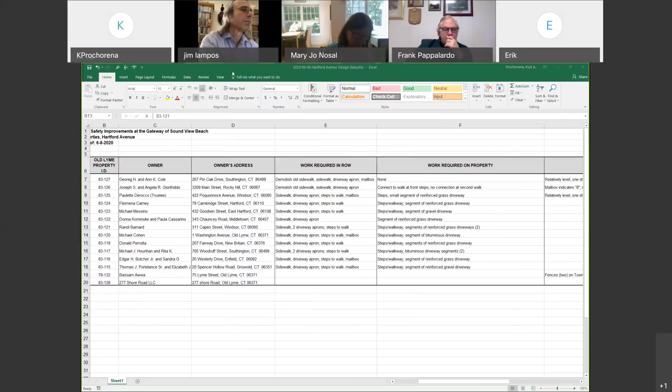Then what will follow, and I'm going to just share my screen again, I am going to finish up developing this package. Sorry, these things are just taking a little bit of time to open. A lot of these are very large files.

Kurt, while that's coming up, is this what you also sent to the building official? I know we got it in a large link. It's similar, but this is customized for each of the property owners, and I think we would certainly send this to him too, just for his, since we're working with the property owners.

Now, if he says, I don't need to be involved, then we wouldn't even bother. But if he says, oh yes, I want to be involved, we will get him a packet of each of these individual property packets, so he sort of has it as a roadmap of exactly what we're doing.

So this is, I use 23 Hartford Avenue as kind of an example. So each packet will be customized to the property owner. And then...

What we will essentially do is include, and again, I'm sorry about the little delays, sometimes these things over the wire. So we'll start off, and think about this in the context of me sitting with each of these people.

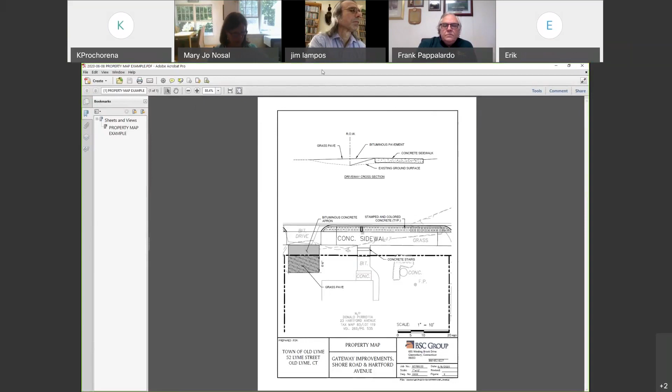This also goes along with, for each property, and again, we won't necessarily need these for every property. Interesting enough, it'll probably be most of them, but you guys may recognize this, you see that whole page?

So as part of the packet for each property where there's a need to go on their property, this temporary access agreement would be in there. And if you notice, I've included an attachments line.

So what I was thinking we would do is, when I meet with these people and we essentially get their buy-in to the various things, we're going to have them check off, and so it's documented, those materials will get attached.

At least my proposal is we attach those materials to this temporary rights agreement, so there's no question. You can see here items 1, 2, and 3. I will customize that for each property.

And once we've agreed to everything, this would then be used to establish the formal agreement between the property owner and the town. The items in there, could be 3, 4, 5 items, would directly correspond with what they picked as far as the various options.

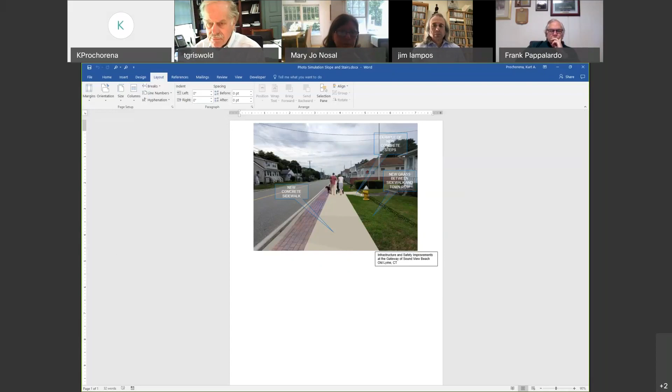So this is one of the examples of where a grass slope's going to be fine. We don't need a planter. So this would be customized to that particular packet. In other words, this packet wouldn't have the plant, the person would never even see that. They would only see it's going to be a grass slope, we're going to put in steps. Then what we would show them, well actually, let me show you another example.

Okay, so here's an example of where there would be a retaining wall and a planter. This particular one could also be combinations of different things. I'm just using these as examples. Each packet will be customized to what's happening at that property.

Once the people understand, this is to give them the visual. As I sit with them, I'd say, yep, you could either have, in this particular case, both the slope and the planter shown, because the person may say, I don't want a planter, I want a slope. So both of those would be in their packet.

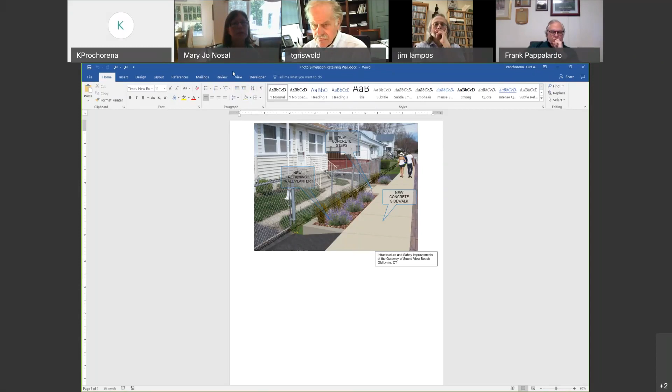Then what we would do at the same meeting, I would show them this package. So here's an example of where the person has steps. So we would tell them, okay, you can pick from 2 options of steps.

Last time we had talked about various options for the stairs. We talked about timber stairs, straight concrete, and granite. Jesse and I have talked, and we feel a few things. We feel, number one, that for steps, we would not recommend any type of timber material.

It's very unforgiving because of its nature. It doesn't really afford you much flexibility as far as riser height or those kinds of things. It's not going to last. We have seen, even with pressure treated timbers, and this is in particular with steps, it becomes a safety issue. They do absorb water, they can crack and check, and the joints can become displaced, which then can cause problems with continuity of the landing and things like that.

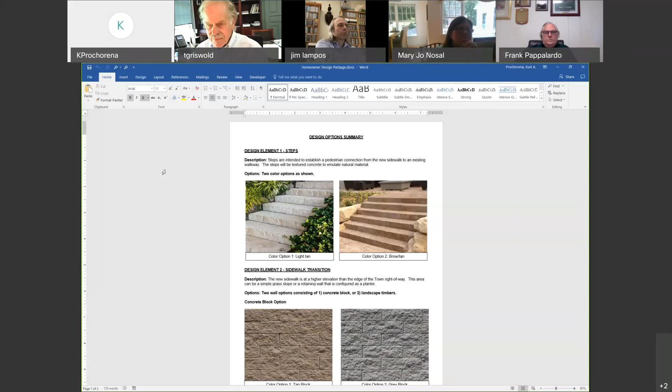So for the walls, we're calling that sidewalk transition. And can you see the whole? Are you able to see that on your screen?

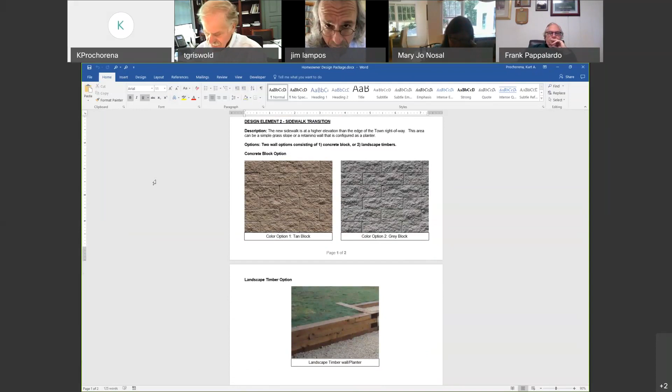Okay, so you can see my little narrative where we're kind of just, and again, I'm assuming all these are going to be little packets stapled together. I am just assuming these people would be taking this packet with them, right? That's my assumption that, of course, if I'm a homeowner, I'm going to say, well, let me take it with me. What I would actually, go ahead, Frank.

It's likely they're going to probably want to think about it a little bit. Right. What I was actually thinking of doing, and I thought about it right before the meeting, if you guys think it's okay, next to each one of these little options, I was thinking of adding a little box that just says homeowner initials. Right? And then they just initial it, saying okay, this is the color I want. That way there's no hurt feelings later.

So here's an example of the wall where I basically tell them you have 2 choices for the wall, either concrete block or timbers. Of the concrete block, here are the 2 color options you have. Initial. Why do we want to give them choices?

Why not just block? At the last meeting, we had talked about offering 2 different colors to create some variations. We could certainly just say, this is it. I'm happy to do that. It certainly makes things easier. At the last meeting, I think we did talk about that, and I think giving them some options, it's not going to really cost us any more or less with options, Tim. So we might as well give them the opportunity to have their say in what they think is going to be best. And I think it'll be easier buy-in that way.

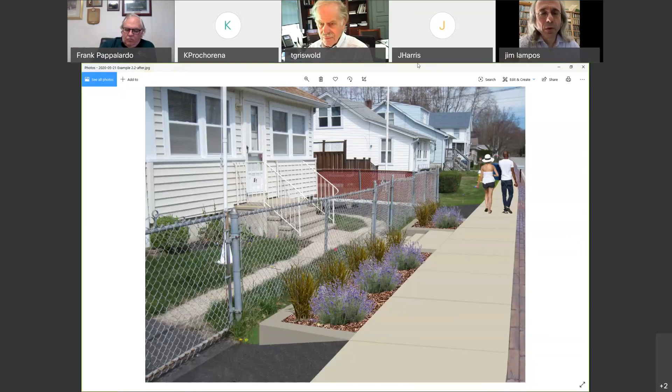A quick question, Kurt. I realize a lot of this stuff is adding up, and we have to balance the perception of making their water issues worse. I understand the slope, I understand what we're doing, and I know we're not going to make the problem worse, but there's the perception issue we have to balance out with a cost issue.

So I'm not beating the drum on needing retaining walls or special treatments on the aprons, I'm just concerned about the perception. I'm also concerned that when we go onto people's properties and change the grade, we may create spots where it looks worse, because we're reducing the area where the water can spread.

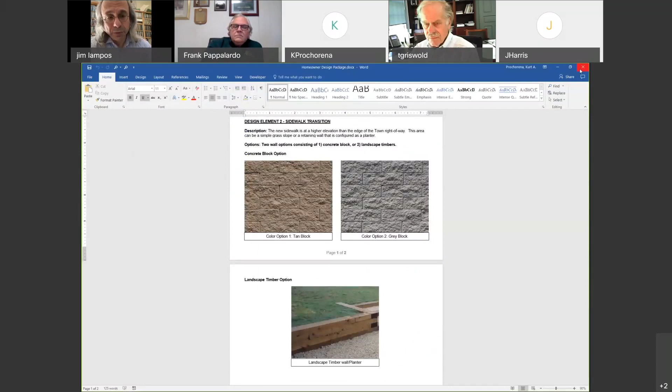So I agree, that's one big concern I have with getting onto people's properties and changing those elevations, changing sidewalk elevations. There's one case where we even talked about bringing the sidewalk up to the first step to make a smooth transition from the driveway to the front steps. Well, then that drop off has to come somewhere, and it comes right in front of the house, and a lot of those places have crawl spaces.

Having had a cottage that was one of those where you had to sneak under it on your belly to do any plumbing work, when water pools down there it's not fun. So my inclination would be to do the least possible, and we have to balance that out with making sure it's done correctly and the perception problem.

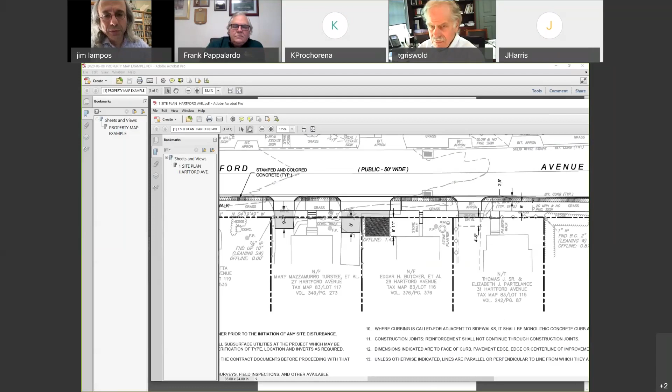Two quick questions. On the preliminary design, the areas of dark black on, say, number 5, number 7, number 9, number 11, 17, 19, is that new bituminous driveway that we're putting in? So can you see the screen that says property map? Yep, 23. Okay, so in this particular case—and Jesse, feel free to jump in, please—

That's grass pave, like we had talked about, because these folks happen to have a grass driveway. So we'll clarify that on the mapping so it's very clear. Essentially what you're looking at here is a blow up from the design, so it will be this clear on all the plan sheets. This one is nice, large scale, so the property owner can really see it, and heck, we could give this to the contractor if we need to.

So it does vary—we actually have 3 materials. We've got bituminous, and I also have them listed out in the Excel spreadsheet: bituminous pavement, grass, and gravel. And if you recall, with the gravel we talked about some material to reinforce it so it held on the slope, some pretty simple geogrids and whatever we can use. So looking at 23 Hartford Avenue, which is our example for the packet, that would be the reinforced turf.

Okay, and in this case you can see Jesse has calculated it's about a 6 foot, 6 inch extension. You can see the cross section at the top, where we've got the existing sidewalk, the bituminous pavement transition section, for lack of a better term, and then the grass pave, where we're picking up and filling in their driveway. And to your point, Jim, keep in mind, this is why the driveways are giving us such heartburn.

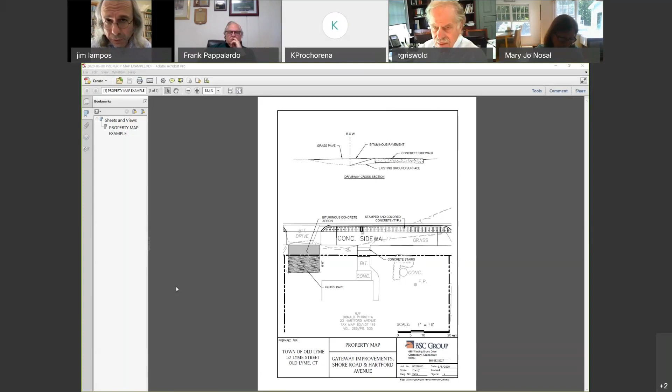And last question, with the retaining wall cost, $5,000 per property for the retaining wall, is it significantly cheaper if we just pour concrete as we pour the sidewalk for a retaining wall and not do landscaping but do grass?

Do you mean like a retaining wall that literally just drops down at the edge of the sidewalk? Right, with no planters. And I think Jesse had mentioned at one meeting you would probably want to put in a small curb or something, because if somebody goes off the edge, it's a liability issue since you're still in the right of way. Imagine a family walking down the street with all their stuff, kids, and somebody falls off the edge of the sidewalk. So we're pretty much depending on a fence for that not to happen.

So for one property we're okay, but maybe a different property we're not. And that's where, personally, I'm a huge fan of keep it simple, less is more, relative to your budget, relative to construction. I love the idea of just the grass slope, and that's it. So maybe we just eliminate the whole retaining wall option. Seems like we're getting into some dicey territory.

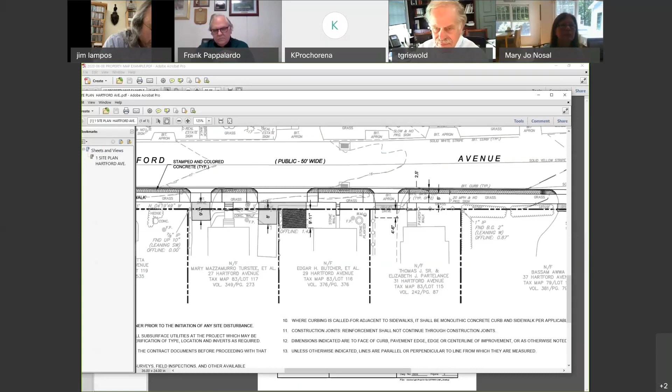We always do our design plans on top of the existing conditions plan, so all the new work is in dark and all the existing conditions is in light gray. It's just going to create confusion when people are talking about where the sidewalk is. Well, what we can do is on the individual sheets, we could get rid of that. Sure, we definitely don't want to confuse people, so we could get rid of that kind of stuff. Gotcha, yep, that's not a problem.

Use the Mylars here, huh? So I am very worried about the cost of these, not so much the steps. If we assume for a second we get rid of the planters, I am concerned about the cost of these driveways because of what's entailed.

As you can see here, with the example that Jesse has created for 23 Hartford Avenue, adding in the bituminous apron, bringing in the fill material, the grass pave, blending in the edges, and then you start multiplying that towards all the driveways that slope down - I'm really worried we're going to be spending a lot of the budget on this.

And you haven't even talked about the owner's sidewalks going parallel to the town sidewalk. That's correct, yeah, and you'll see that on the spreadsheet. So whereas some of these things, when you look at them individually, it's a few thousand dollars here, a few thousand dollars there, but then you start adding it all up, that's what has me really worried.

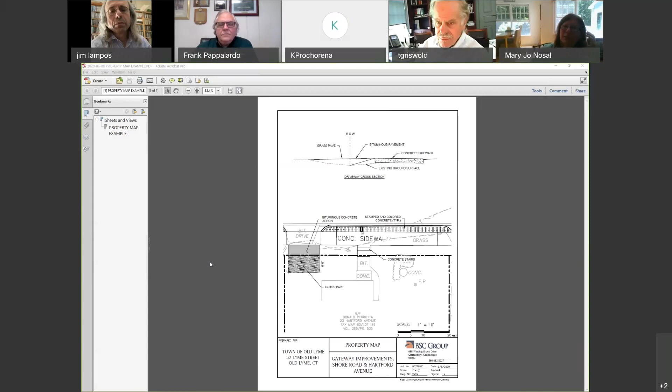So looking at Jesse's cross section as an example, Jesse, are you on? Can you hear me? Yeah, sorry, we've got a bear and cubs roaming the neighborhood, so my dogs are going bonkers. Oh, a bear sighting? Yeah, a bear and two cubs have been wandering around here. Wow, okay.

So I've been stepping away, that's why I'm not on video. That's a first for me.

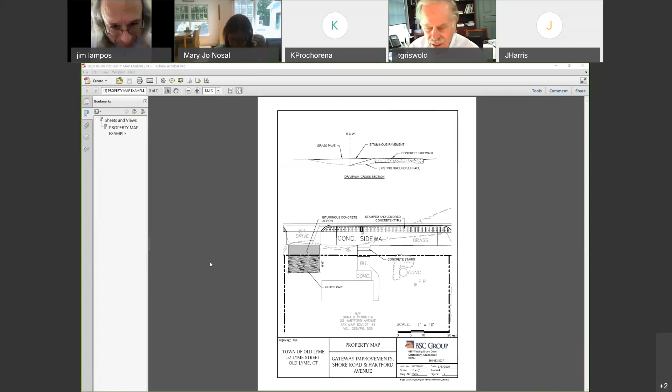I gotta jump in here, folks, I have to head out. I'm going to try and rejoin the meeting if I have staff at my restaurant when I get there. Okay, sorry about that. Bye, Jim. Thanks. Thank you. Thanks, Jim.

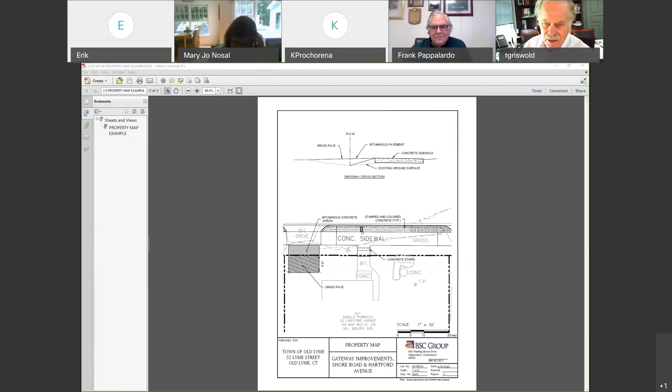Would it be possible to do these cost analyses on the driveways, the planter, any sidewalk work that would be required on their property to match the driveways and so forth. If we're only talking about 5 of these things, it would be interesting to have you guys show us what the cost would be so we know what we're talking about. Right now we're saying $5,000 for a planter, and we don't know what this other stuff might be—it could be $10,000 or $15,000 a property for the severe ones.

Yes, and would it be hard to quantify what those variables will cost? What we can do—and this is something that, unfortunately, when we do cost estimating, it's hard to predict economies of scale—is when we do cost estimates, we do it by individual items. We have a unit cost for that item, then we use the estimated quantity and come up with an extended cost. A contractor tends to look at things a little differently because he's looking at how long things will take, what kind of crew we may have.

So yes, we can absolutely account for them accordingly. We tend to be a little higher because, as an example, we'll come up with a square foot cost for the retaining walls and use that number. But a contractor may say, well, on this project I've got quite a few retaining walls, there's a lot of economy of scale there, I'll have the same crew go through and do it, and the actual cost could be less. But absolutely, we can do those estimates.

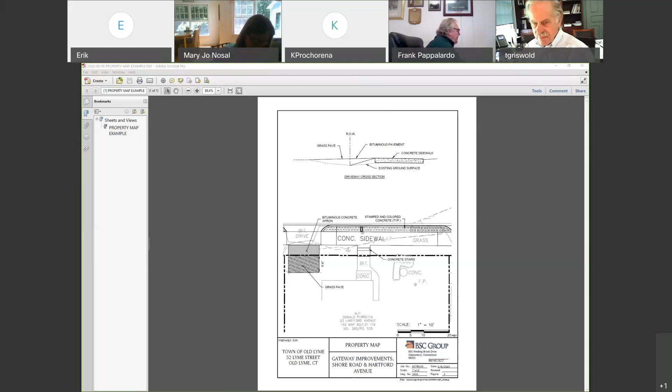What I'll do is add different columns to that spreadsheet—I'll add steps, driveway, so you can see on an individual project basis. Once we have it in Excel, we can manipulate those numbers any way, meaning we can mix and match, pull things out, put things back in, and really see what effect it has on the project. So I can get working on that immediately.

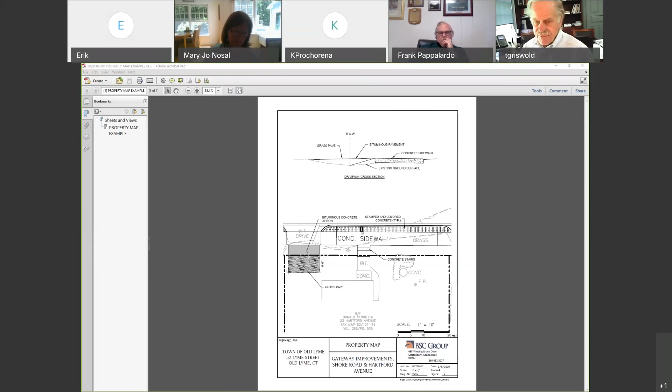Yeah, because some of them will have double driveways. That's correct, as an example, and you'll notice that on the Excel spreadsheet. So property 27, they have 2.

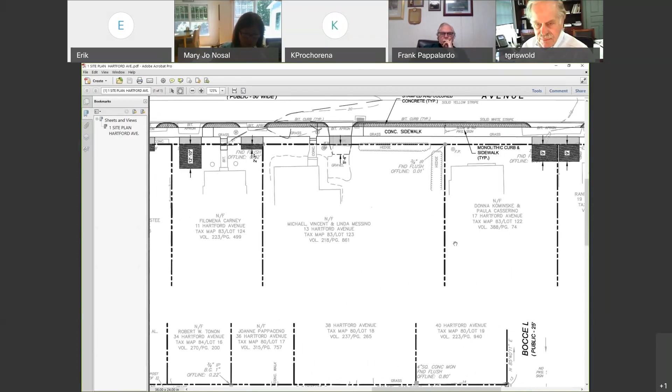This is 19. They have 2. So there's a few of them. I think it was 3 of them. I think 11 has 2.

We can definitely break those out and have them on the spreadsheet as separate line items. I'll send it to Mary Jo, and she can distribute the actual Excel spreadsheet so you guys can literally edit it and manipulate the numbers to see what effect pulling things in or dropping things back out has on the overall cost.

We'll get the overall cost estimate wrapped up quickly. Once we do that, I'll get the spreadsheet, which will be an extension of the overall spreadsheet, organized by property, whereas the overall cost estimate is just by item. I'll create an extension that is the same data, but by property.

Yeah, that would be really helpful. Yeah.

To reiterate, I'm quite nervous about this. Looking at these plans, I see some of the driveways, and in order to meet that 5% slope, the fill we're bringing in, etc., I'm definitely concerned about the cost implications. You mentioned that the town, to be totally antiseptic about it, has no responsibility to do stuff to accommodate steps, driveways, or anything, technically.

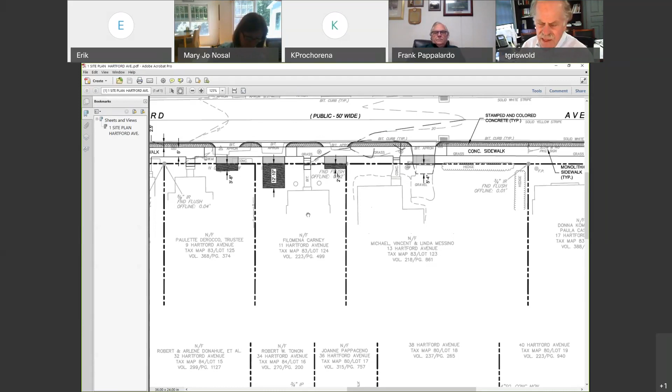But I think you don't have an obligation for planters or steps. Driveways, I think you do have an obligation for, because that would be a good arguing point. If we say we can do your driveway, but the rules say we don't have to do anything else, that sets the stage.

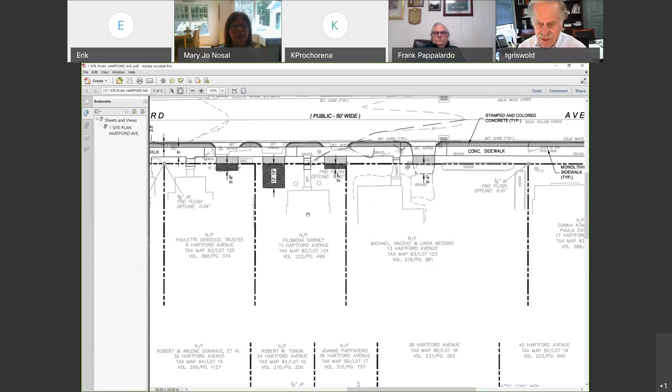So if we say we're willing to help you, and maybe we can do some cost sharing here and so forth, then they know in the back of their mind that if they play hardball with the town, it'll simply say, well, you're asking for the moon and we can't deliver.

Can everybody see my screen? Yeah. Looking at 32 Hartford Avenue, you can recognize the gravel driveway, and then the house we always reference with the two driveways and the chain link fence.

This is really kind of our worst area. You can see they have a little concrete walk. Right along the lines of what you're saying, Tim.

We could say, look, we're not going to build any infrastructure from the sidewalk down to that walkway. If money was no object, sure, happy to do it. But you're right, in a case like this, if you want to extend that sidewalk to your walkway, to the new sidewalk, you can — you go get the right permit through the town building department. But this project is not going to connect it.

Whereas the driveway is different, because in that case, I feel — and again, I'm not an attorney, I don't know if it comes into legal issues — but rationalizing it in my head, you're not cutting someone off from their property with the sidewalk. Whereas with a driveway, using this as an example...

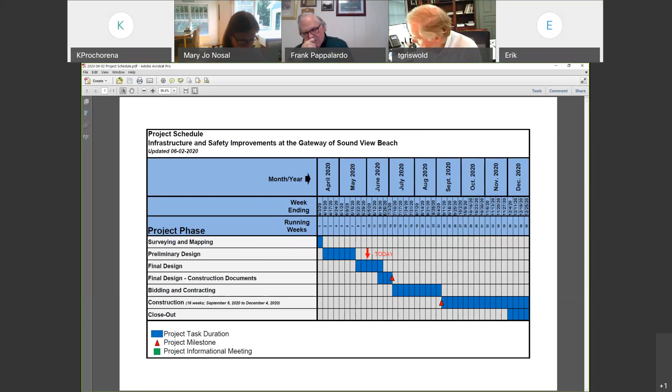We'll be strong. Along the same lines, Bonnie, although she couldn't join us, sent a suggested letter in particular to the folks at 31, and I'll just read it to you because I pulled it off my email. I thought it was a good general message as we're putting the individual property owners' concerns down. She wrote or suggested...

Dear property owners, thank you for your letter regarding the planned sidewalk on Hartford Avenue. We have shared your concerns with the entire grant committee for review, along with other comments we have received from residents. In your letter you expressed concern that the sidewalk would encourage more people to come to Sound View. Please be assured that the installation of a sidewalk is being completed for public safety, as we have seen over the past many years people walk on Hartford Avenue rather than on the right-of-way within the grass area. In addition, there was consensus from businesses on Route 156 at the head of Hartford Avenue that connecting the beach to their business would be a positive change.

In regards to the financing of the project, it is important to note that the grant was given specifically for this connectivity project, so spending it on other items such as tearing down blighted buildings would not be an option, nor would the town be funding the tearing down of blighted buildings. Lastly, the construction of the sidewalk would be fully within the town's right-of-way and would not encroach upon the property of Hartford Avenue residents. Thank you again.

So I thought it was a good summary as we're planning for our individual property owner outreach. That might be a good letter to respond back with, and then we should pick out some talking points so that when we do get questions, we have pretty much standard talking points to go towards. Agreed.